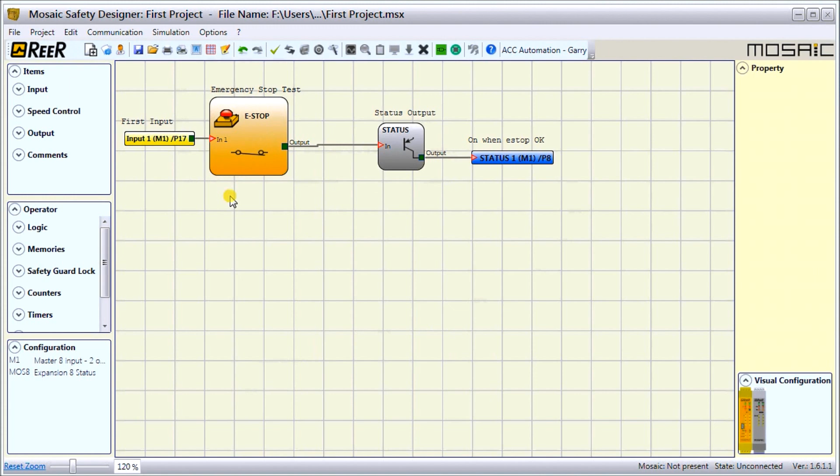So the first thing we'll do is look at the actual hardware that we have. Here's my M1, and then we have our MOS8, which is our status output, and then we have our safety relay output. So that is our system, and we now have an emergency switch right here.

So if we look at the wiring, last time what we did was we wired all of pin number 1 to the positive and all of pin number 4s to the minus. That's what our initial wiring was. So if I call up the wiring diagram, this is what we have: 1 was 24 volt and 4 was 0 volt.

Now you'll also notice that we have black wires on pin number 2 and 3, which represent our master enable 1 and 2, and they are also going back to our 24 volt supply.

So then we have our first input, which is our digital input, pin number 17. Now if we were to look back at our drawing, you will see that pin number 17 is the pin that it automatically specifies when we entered our program, and our output was pin number 8. So pin number 17 is on our e-stop, and pin number 8 is on our output.

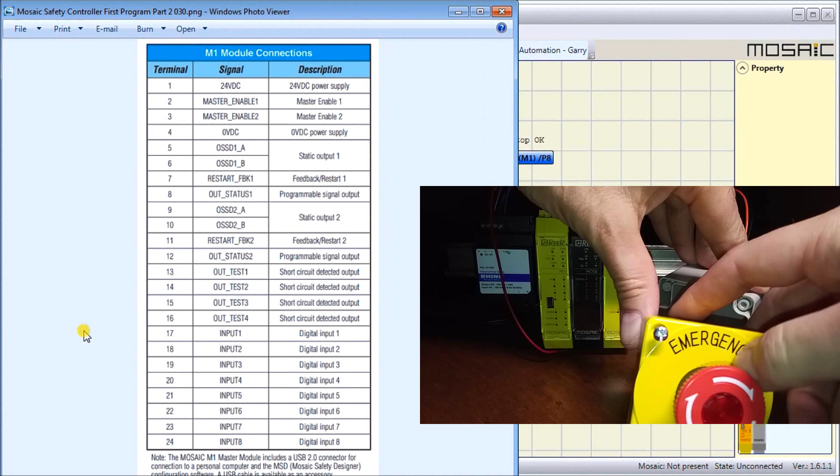So let's go back to that diagram here, and we'll take a look at our emergency stop switch. We'll pull that out, and I'm trying to flip that over. What you'll see is that we have the blue and the red wire coming out, which is going to my lamp of my emergency stop switch. And then we see my black and my orange wire here are going to the contact of my e-stop circuit.

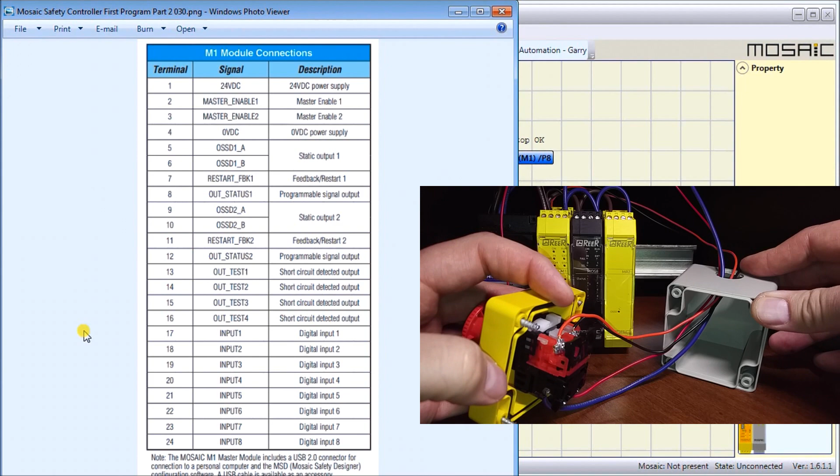So let's just try to put all that back together, or somewhat. So that is how we have this wired. Here is my output, my red, which is my status output, and it's going to one side of my lamp, and the other side of my lamp is coming off with the blue wire, which is going back to our 0 volt. So it is truly a PNP, so we're pulling that up to positive.

And then for my contact, I have pin number 17, which is my orange wire, and it goes into the contact of my emergency stop switch. On the other side of it, it goes back to my plus voltage. So that is my input.

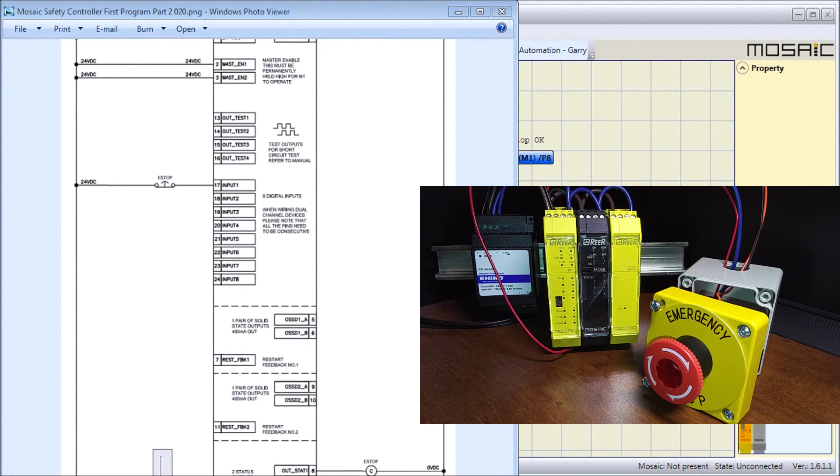Now to actually see the diagram, this is what we have here, let me just make that a little larger. So here is my input here, there's my e-stop. My input goes off my 24 volts, so 24 volt to one side of my e-stop, and the other side of my e-stop goes to pin number 17 of my MOSAIC M1.

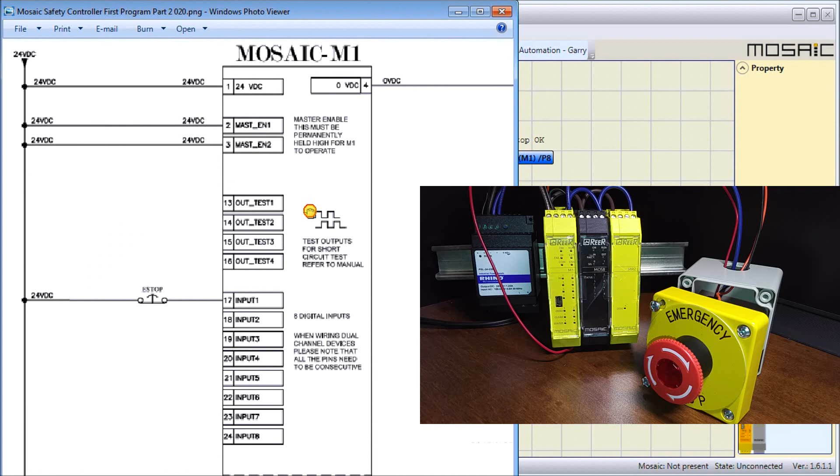Then if we look at our master enable 1 and 2, again they go right to 24 volt, which I have shown. Then on my output side, I have my status output 1, which is pin number 8, and it goes to one side of my e-stop lamp, and my other side of my lamp goes to 0 volt. So that is the wiring.

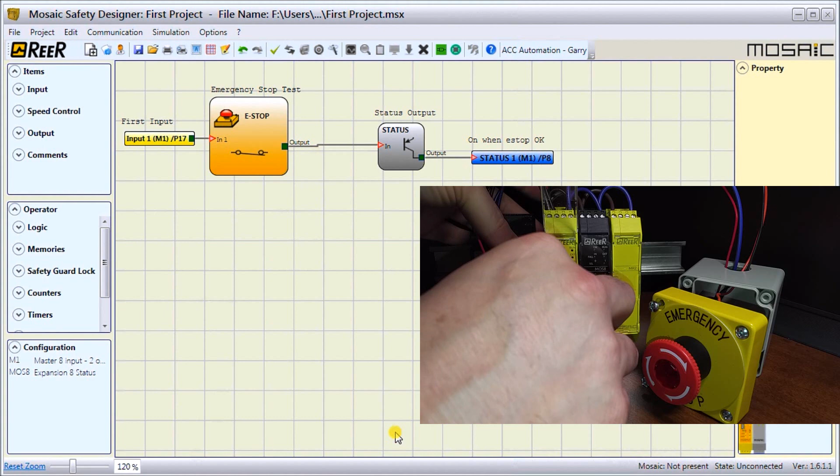So let's go back to our program here, and the first thing we'll do is now we will connect to the MOSAIC. So down in the corner here, what you'll see is the MOSAIC, it says not present. So what we have to do first of all is to plug the MOSAIC into our USB and power it up. So we'll flip the lid here and we will plug this unit in, just like that.

And let's turn on the power now. What we'll see is just after a few seconds, you'll see our MOSAIC now says present. So now we are connected through our USB here. You can see that we are now connected into our system.

Now our state is unconnected, meaning that we're not really monitoring or doing anything right now. So the first thing we have to do is we have to connect to the M1. We can use the icon right up here, or we can go communication, connect, and it will ask us for our password.

Now we have 2 levels of password. Because we're going to be downloading the program, we're going to need the level 2 password. Now this is all capital letters and it's SafePass, SAFEPASS. We'll hit OK. And now what you'll see is down in the bottom corner, we'll see MOSAIC present, and then we'll see the state connected level 2.

Now the next thing we have to do is download the configuration, or send configuration. Up here on my main screen, you'll see my icon for send configuration. Once again, if we look under communication, we can say send configuration. And we have a notice alert as soon as we do that.

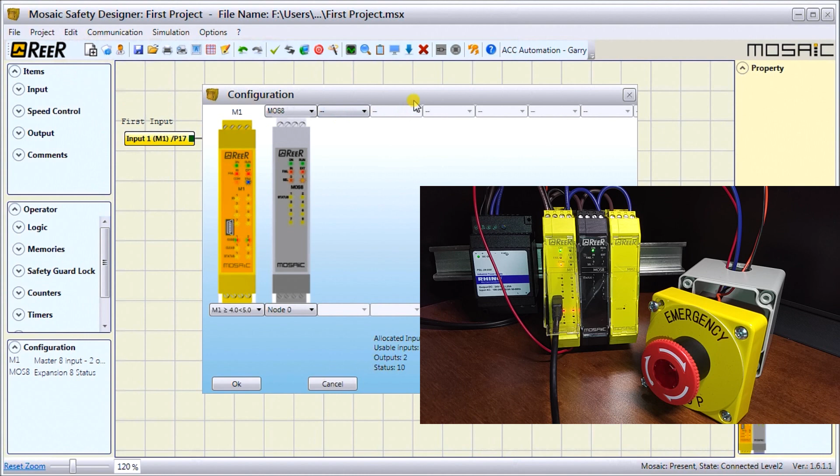What we can do is go to project, change configuration, and under this note here where we didn't know what we had before, we are now going to change that, and we said it was 4.0. So we'll change it to that. Now it's 4.0, and we'll just hit OK.

So now let's do the connection again. There's that configuration, and now it did a quick firmware check, and we have equal. So now it says, are you ready to send the configuration to MOSAIC? We'll say yes. And now it's going to be writing the information from our program that we just did down to our MOSAIC system.

You will actually notice that we have the communication light on our M1. This takes roughly 15 to 20 seconds to send that configuration down. It sends it, verifies it, and makes sure everything's running before it says okay, I'm done. And we will get a successful indication like we do right here. Programming successful, we can hit OK to close this window now.

So we've successfully downloaded our configuration and our program. What you'll notice here is that even though we're still communicating, we do not have a run light on yet. That's mainly because the MOSAIC M1 controller will not go into run mode unless we disconnect and restart that project.

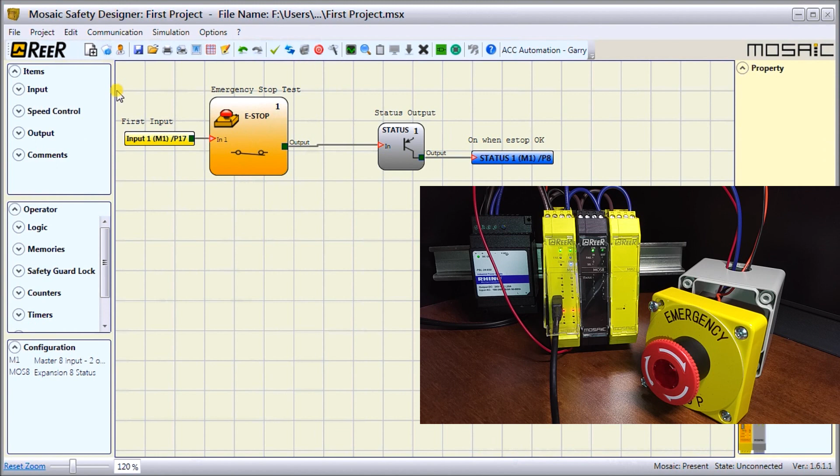The next thing we'll have to do is, now we've downloaded, we can actually monitor our system. If we go up here, again we have an icon for monitor. When we hit that, our password level comes up. You'll notice it says password level 1 or level 2. For monitoring, all we need is level number 1. So we'll hit OK, and because we do not have a password on there, and the default is no password.

When you do that, what you'll see is our screen changes slightly, and we will have a table with our on-off state that we can monitor. Currently right now, our input is off, our status output is off. So if I were to come over and turn on the switch here, you will see that now my input is on. So now the switch is hit, and my status output is on, which causes my light on my emergency push button to be on. We can see that right on our monitoring display here.

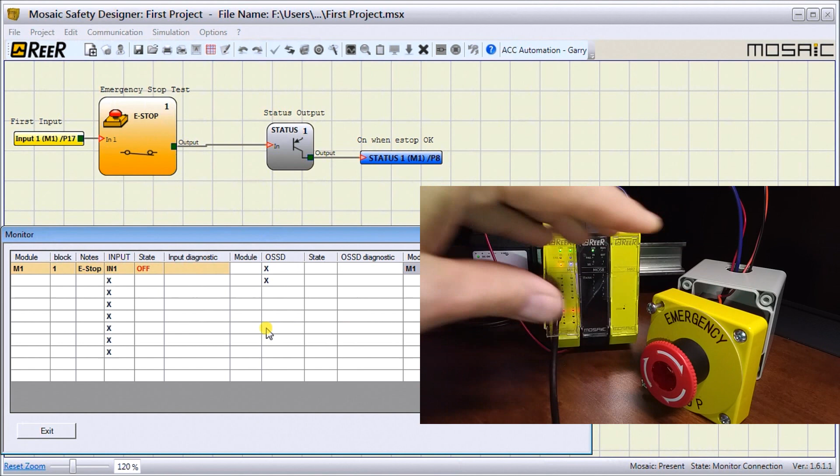So if I hit the push button, you'll see it automatically goes off on the monitor and off on our status, representing exactly what we see here in our diagram. So in order to go out of this mode, we will just hit monitor again, or hit exit, and then we're back into our regular mode. Now we're still present, but we're not connected.

Next, we also have a graphical monitor mode, and this will do monitoring similar to what we had with our simulator. Again, it'll ask for a password. Level 1 does not have one, so we'll just hit OK. What you'll see is now we have a graphical representation of what's actually happening with our hardware. So we're currently testing our logic out. Currently right now they're both off.

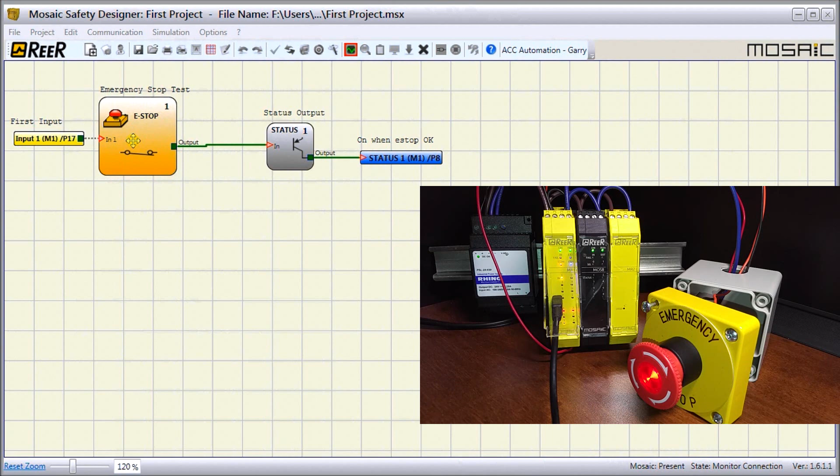Now, in order to get out of this graphical monitoring, you hit the graphical monitoring button again, and we get back to our normal offline state.